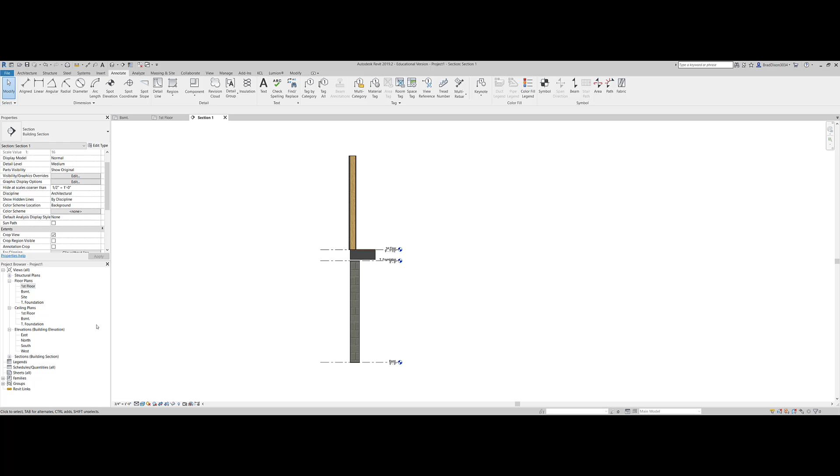Welcome back to Revit Tools, Tips and Tricks. In this video we're going to add a detail component right here. Actually there's going to be about 3. We're just going to add some blocking to this.

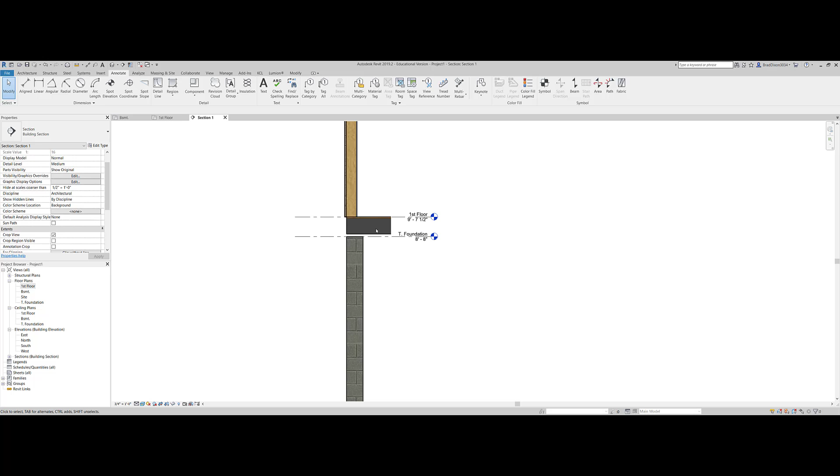Right now we have some plates and a rim joist. I have a foundation represented here, a floor system here, and a stud wall system or stud wall assembly here.

So I want to add my sill plate right here. To do that, I can go to my Annotate tab, come up to Component, do the pull down, and click Detail Component.

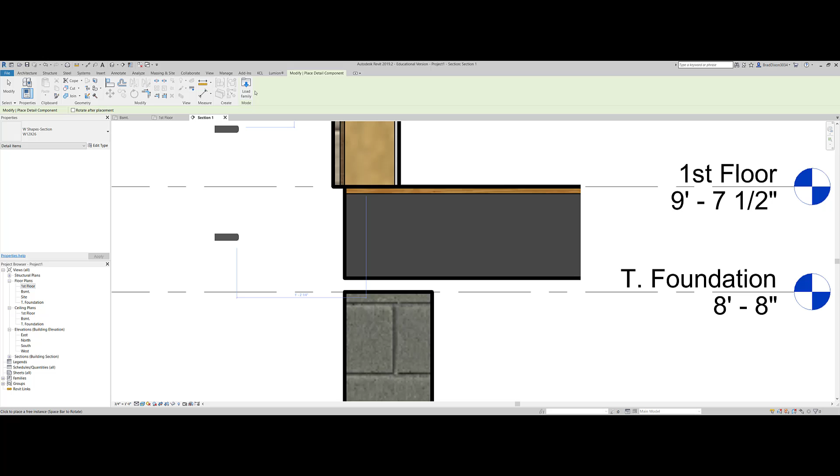Now within here, I'm going to have to load the family. I'll go back to my US Imperial main category, and in this section there's going to be detail items, broken down into divisions. So I'm going to find wood and plastic, then wood framing, and then nominal cut lumber section.

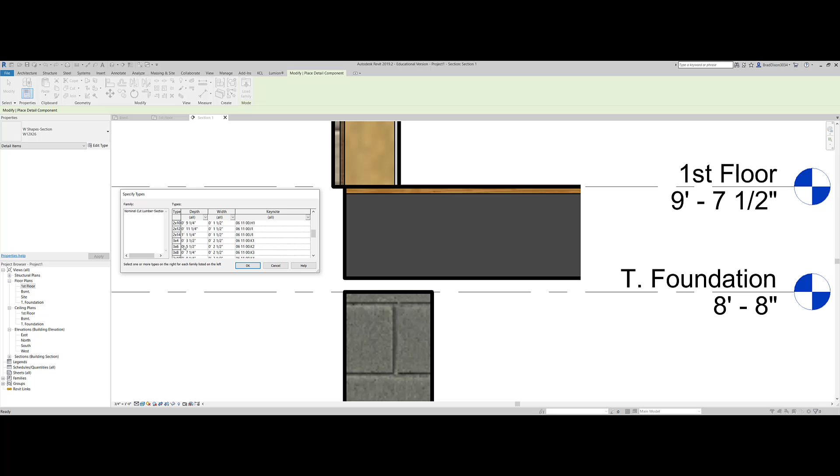I open that, and in this case I'm going to use a 2x8 pressure treated sill. I scroll down here, find a 2x8, say OK, and right now it comes in vertically. Just to get it the other direction, horizontal, I hit my space bar and it flips.

So I can keep flipping it around, get it where I want it, and drop it over there. Then I'll use my align tool to get that into place. I want this bottom line to be aligned with that one, and this line to be lined up with that one. So now I have my sill right here.

I'm going to do the same thing here very quickly. I go to Annotate, Detail Component, Detail Component, load the family, nominal cut section, open. This time I'm going to do a 2x6 right there.

Select the 2x6, hit the space bar. I must have got the 2x8, so I have to come up here and actually select 2x6, hit the space bar, and drop that into location.

Then I'm going to grab one more nominal cut section. This time I'm going to use a 2x10 right here. So I scroll down through, select 2x10, say OK, come over to my properties panel, actually select the 2x10, and drop that right here.

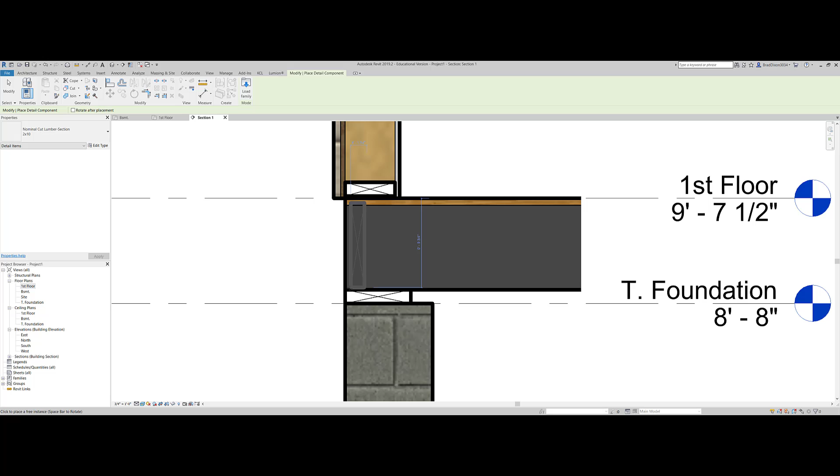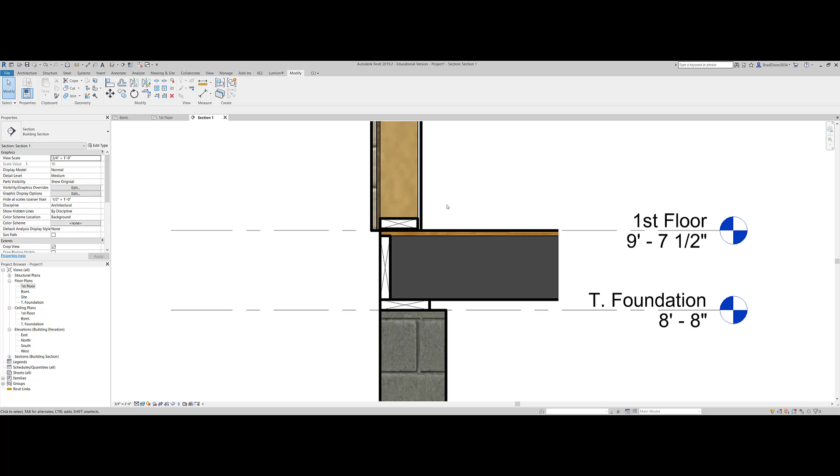The next thing is I use my align tool to get that lined up in every direction that needs to be aligned, and it looks good to go. So now I have these 3 detail items added to this picture very quickly and easily using the Annotate detail components.